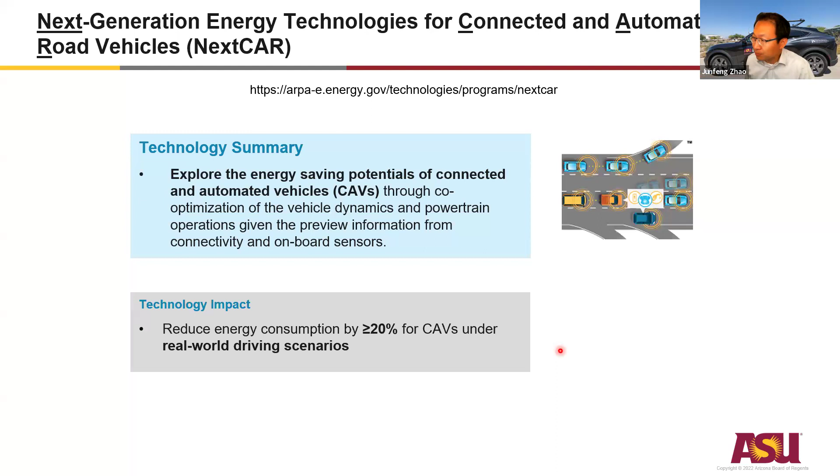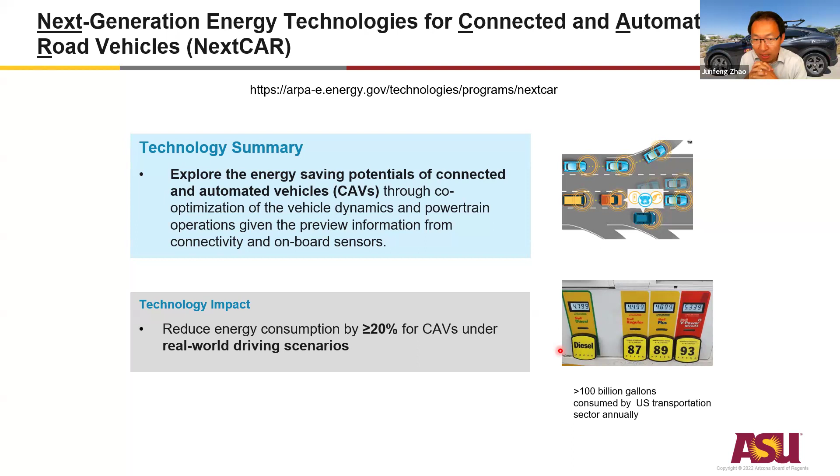Now let's look at the first part. So in 2017, ARPA-E launched this NEXTCAR program, like I mentioned, mainly to explore the energy saving potential for connected and automated vehicles. Because we'll have onboard sensors, we'll have connectivity, then we can have better preview of what's going to happen in the traffic scenario, right? How do we leverage that and combine it with vehicle dynamics and powertrain control to improve not just the vehicle itself, but imagine we consider the transportation system as a whole? How do we improve the efficiency? The goal was quite ambitious. The overall program goal was to reduce energy consumption by more than 20% for CAVs under real-world driving scenarios. One thing is 20% is a keyword. The other is it has to be proven that it works in real-world driving scenarios. I think during that project, those two were kind of two challenging key points.

So back then, there were in total 11 teams participating, across different powertrain types: light duty, medium duty, heavy duty vehicles. GM, actually our team, was the only industry-led team participating. So we focused, back then, on the light duty vehicle.

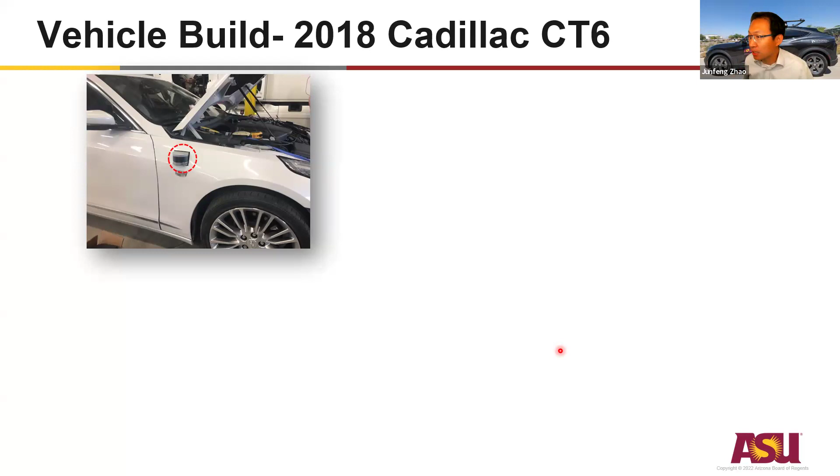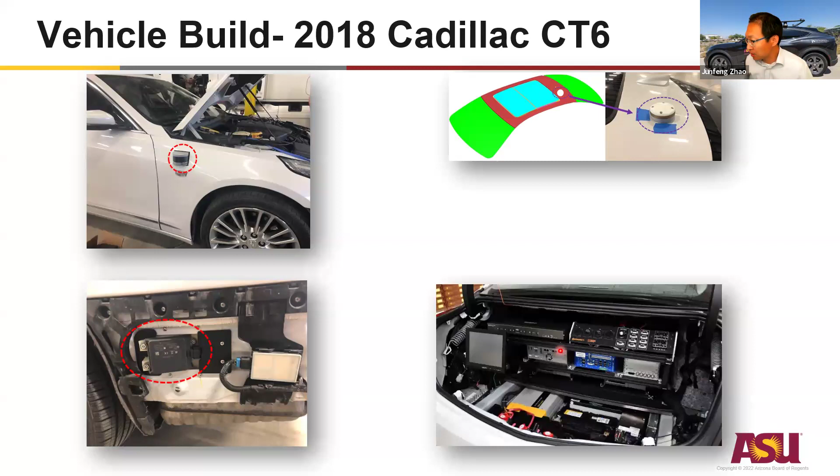So this is our test vehicle. We took the 2018 Cadillac CT6, the first generation vehicle model equipped with GM's Super Cruise Level 2 automation capability. But then we added additional sensors to the platform. You can see one of the Velodyne lidars installed here, one of the radars installed behind the bumper, that's the antenna, GPS, and there's a bunch of things in the trunk. But this is a final product, so all the sensors were integrated to try to make it look like a normal vehicle, close to a production type of vehicle.

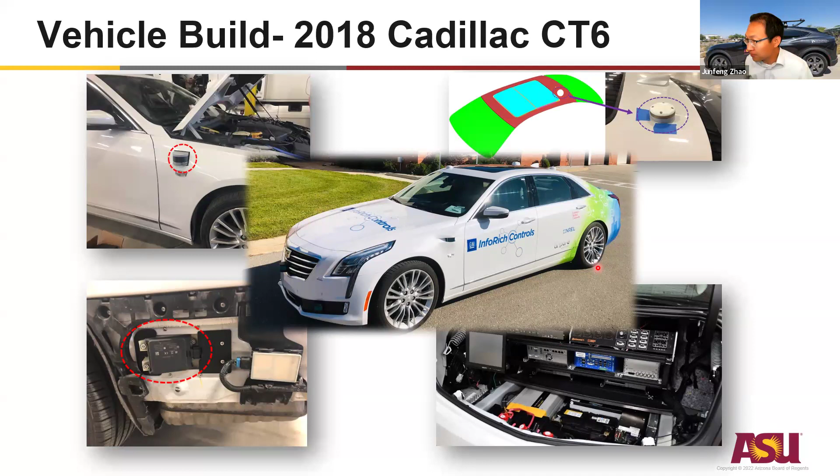And of course, we need connectivity to make it not just automated, but also a connected vehicle. So we have installed a DSRC module on the vehicle. At the beginning, we tried to install an experimental Continental eHorizon module, but eventually we didn't fully utilize that one — we just leveraged the HMI capability from it.

Computing power-wise, we have in total 5 CPUs installed. That's a lot of computing resource, but at the same time it consumes a lot of energy. We had to reroute the AC pipe into the trunk to cool them down. So that's one thing. We also have 2 MicroAutoboxes.

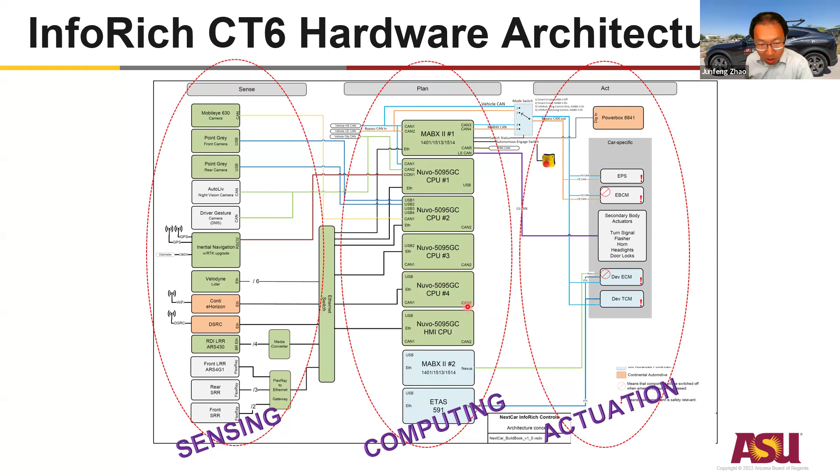We also have another dedicated real-time controller to do the powertrain control ECU calibration control, so that we can recalibrate the ECM and also the transmission control. Overall, it's quite a lot of components integrated, and quite a complex system to debug.

Okay, so after talking about the hardware, let's take a look at the software design. Basically, we took the software developed by both CMU and GM as a very classical architecture. We have the perception, we have hierarchical planning from mission planning or route planning, behavior planning, all the way to short-term path planning, and then it goes to the actuation part.

That's a very classical architecture. But on top of that, we basically integrated a new algorithm to enable long-horizon speed planning, leveraging the onboard sensing capability plus connectivity. Here, the connectivity mainly focuses on getting signal phase and timing from connected traffic lights, in order to enable eco-driving for the system.

So that includes, for example, if you can predict there's a lot of traffic in front of you, or the traffic light is going to turn red although right now it's green, you want to actively manage or plan your vehicle's speed trajectory so that you can achieve the most efficient driving. Or for departure, you can calibrate the aggressiveness when you start from a stop. And for eco-cruise, you want to make the speed trajectory of the ego vehicle smooth and harmonized with surrounding traffic.

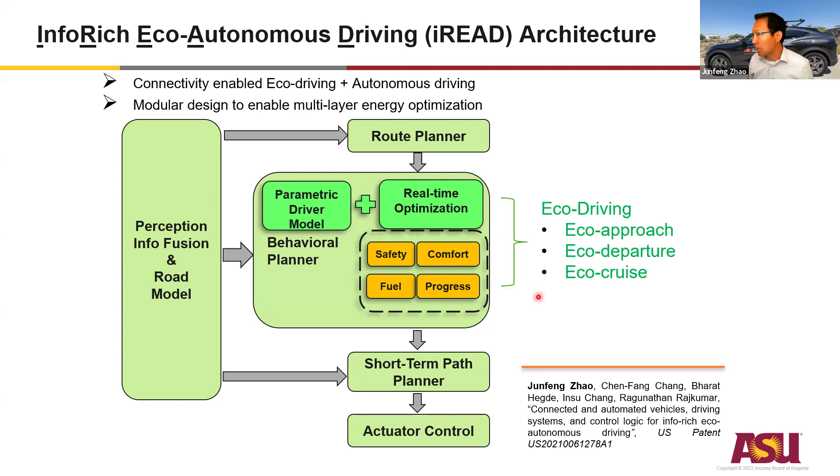In order to achieve that, we designed two components. We introduced a parametric driver model and also conduct real-time optimization considering several factors, including safety, comfort, and fuel consumption — that's the main thing considered — and also progress. I'll introduce how the algorithm considers those factors.

This is the parametric driver model we derived from the classic intelligent driver model. The difference is now we have to consider, for example, the stop situation. There are three terms governing the acceleration or speed profile. One is speed tracking, so we have the speed limit of the road as one of the parameters. Of course, we also have to look at the car-following distance. The third one is just the stop, which could be a stop sign location, or it could be the distance to a traffic light, a red light.

So this is how you define those minimum distances. There is one variable here very critical for our design: the headway. This headway defines the minimum distance for car following, which is a dynamic part of this equation.

There are many parameters we can tune to change the driving behavior derived from this model. For example, we can give different values for the aggression factor. If you look at the curves with different aggression factors, it can dramatically change how the vehicle accelerates or decelerates. The speed factor basically determines whether you will drive at the speed limit, below it, or above it.

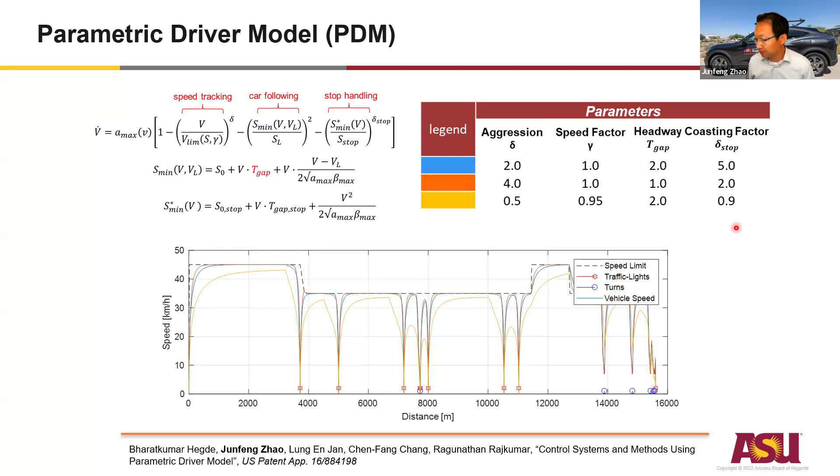So this is our real-time optimization algorithm. There are several steps. The first one is to assess the ego vehicle's current traffic environment. We specifically focus on, for example, what's the status or future status of traffic lights, and also what's the lead vehicle situation.

Mostly this project focuses on longitudinal control; we don't do the steering or lateral control, because longitudinal plays a major role in terms of fuel economy.

So your headway could be—we set a constraint—between 0.5 second and 5 seconds. Of course, we have different weighting factors based on the distance we can evaluate.

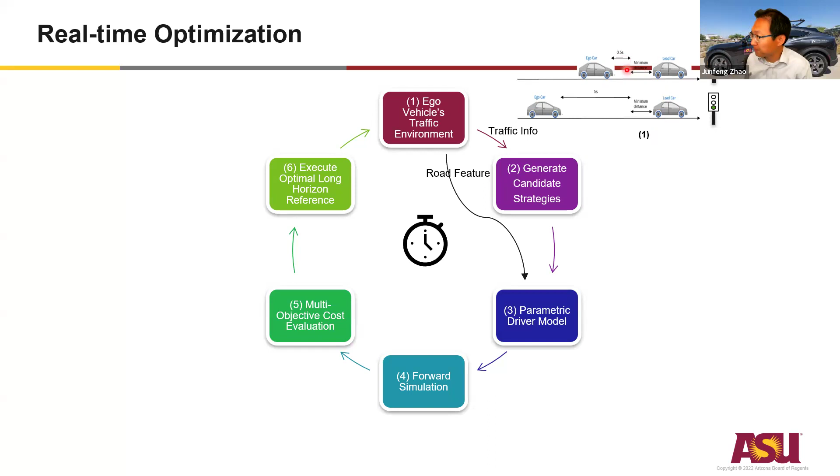Then we will do the sampling for the headway. Assuming your current headway is 1 second, and we predict over a long horizon of 10 to 15 seconds, what would be the options? What would be the candidates? What would be the potential trajectory that the ego vehicle can drive at?

For example, we can start with this small headway and gradually increase to the maximum, or we can reduce to the minimum, which is 0.5 second. That difference in headway will lead to a different speed trajectory or acceleration profile, based on this parametric driver model. For each headway profile, we'll get a different acceleration profile.

Then we can inject that into the model and do the forward simulation, based on the current ego vehicle's location, dynamics, and surrounding vehicles—especially the lead vehicle's current status and kinematics model—we can do the prediction of how, in the next 10 to 15 seconds, that situation will evolve.

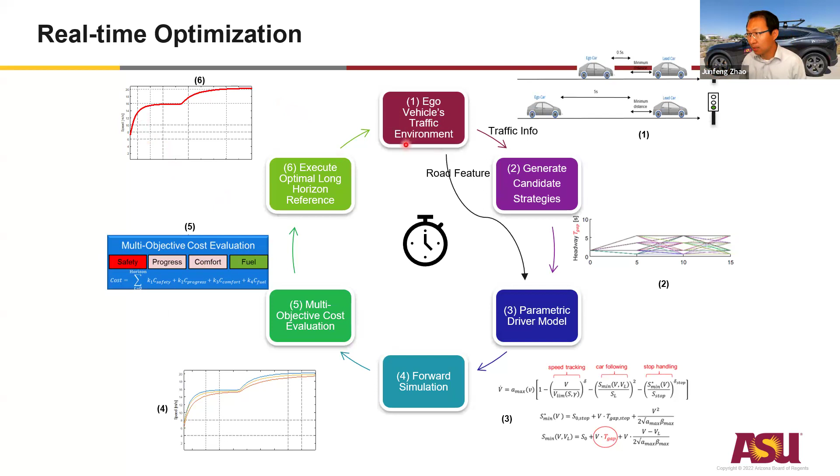Then we'll do the multi-objective cost evaluation for each candidate profile, paying attention to those 4 factors, and then get the most optimal one and use that one to be executed. So that's the algorithm development.

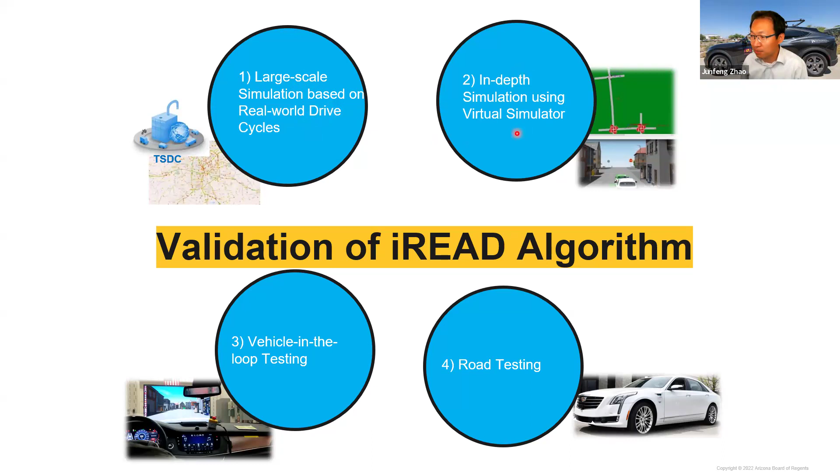But in order to validate effectiveness, how that affects fuel economy, we developed 4 different testing approaches to validate: the first one is large-scale simulation, second is in-depth simulation, and then vehicle-in-the-loop testing and road testing.

This part was handled by NREL mainly. So they took the algorithm we developed and plugged it into their database. They actually selected 10,000 routes from their TSDC database.

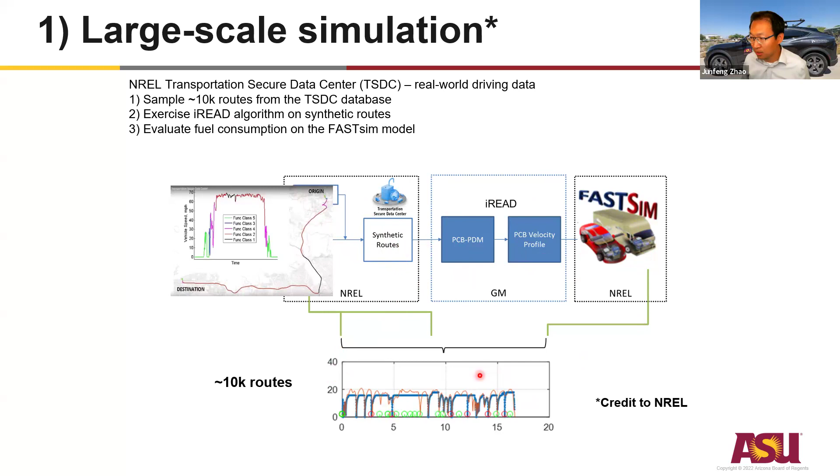They did synthetic routes and basically generated longitudinal speed profiles, then ran them through their FASTSim model and computed the fuel economy difference. They've done this for 10,000 routes.

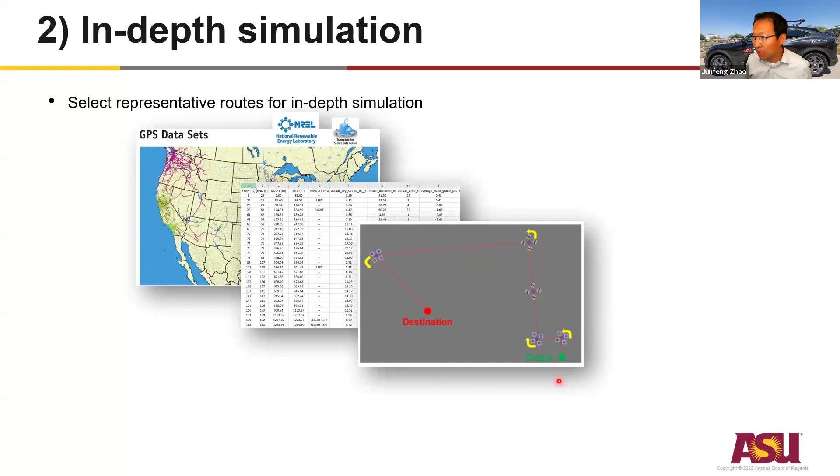From those 10,000 routes, we select roughly 16 to 20 typical routes and do the in-depth simulation. We generate those routes in the 3D simulation environment and test with higher fidelity.

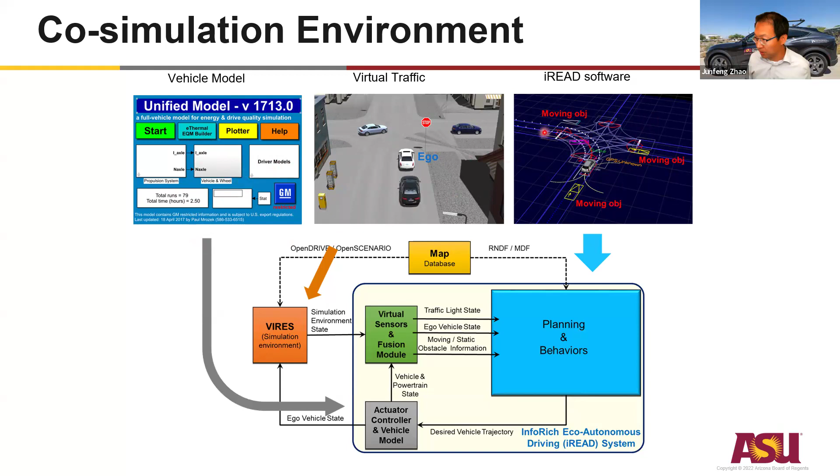So we construct this co-simulation environment that involves a virtual traffic environment, the autonomous driving software stack, plus the in-house vehicle and propulsion model. This can closely reflect the dynamics and fuel consumption of the CT6 test vehicle. We put them all together to do a co-simulation for those selected scenarios.

So this is just a short video clip to show how it works. You can see that's the ego vehicle's model, and we have traffic lights. The vehicle will predict the traffic light phase and timing, and drive in this virtual scenario. We can collect the fuel consumption or other vehicle information from the high-fidelity vehicle model. That's how we do our in-depth simulation.

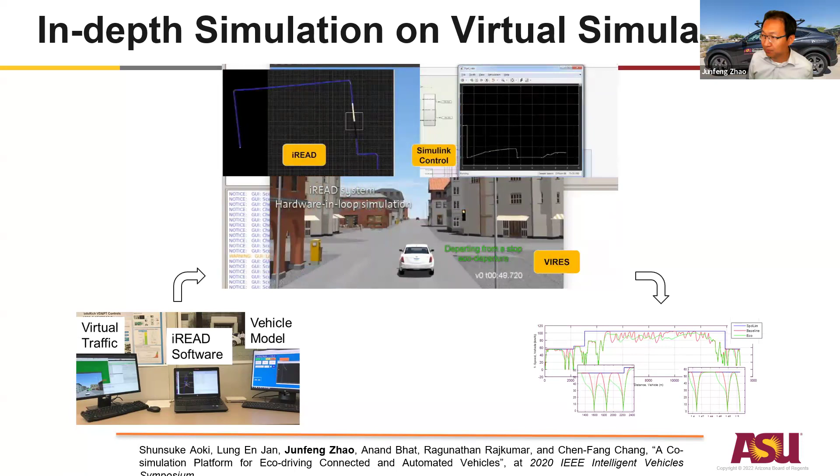Then we move one step further, because everything before that was simulation. Now we start to really look at how does that apply to a real vehicle. So we did this vehicle-in-the-loop setup. The idea is similar to the co-simulation. We still use a virtual environment, but this time we'll generate the speed trajectory and directly apply it to a real vehicle, the real test vehicle running on the chassis dyno instead of the vehicle model.

Of course we have dyno control, and we have real-time feedback, real-time speed and other measurements going into a 3D vehicle dynamics model, and it goes back to the virtual environment to close the loop.

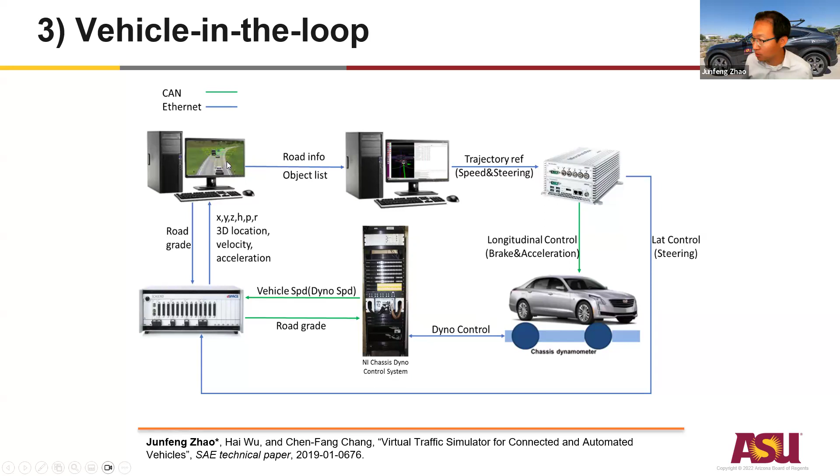So this is the setup we have at the back at GM Proving Ground. The vehicle was secured on the chassis dyno, but in front you can visualize the virtual environment the vehicle is being tested in. We also have a fuel meter hooked up to the vehicle. That's one specific benefit we can get from this vehicle-in-the-loop setup.

Because we do want to have the precise - that's a kind of requirement - the real-time precise fuel consumption measurement. So in this indoor setting on the chassis dyno, we are able to do that.

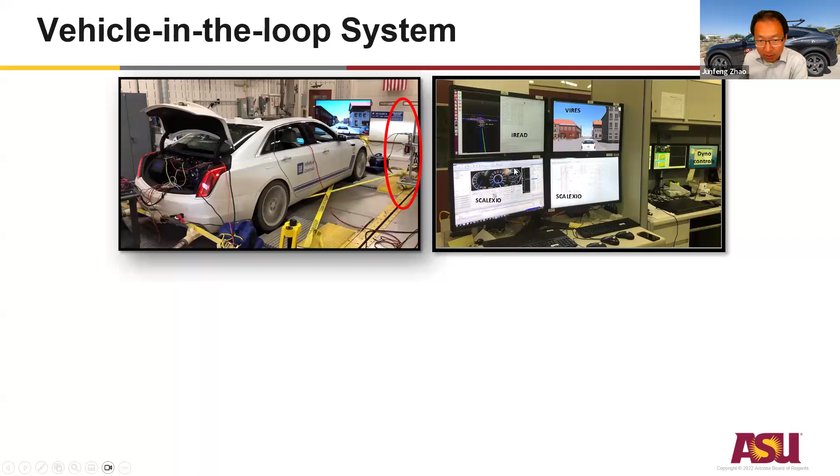So this is in the control room. We have the virtual environment simulated, the autonomous driving software, and the controller, and the 3D vehicle dynamics model running at the same time.

This is just the cabin view. If you're a driver, or a passenger in the driver's seat, this is what you can observe - the virtual environment - but at the same time you can real-time monitor the fuel consumption and other powertrain characteristics.

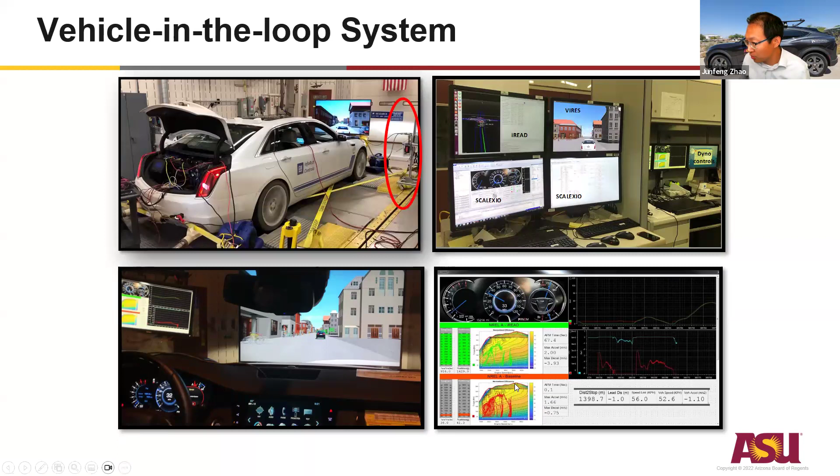So this is basically - we can do the cycle-to-cycle comparison to see for each scenario how much cumulative fuel consumption we had. This is the engine map and other calibrations.

And this is a video clip to show how everything is in motion. So you can see secured on the chassis dyno, the vehicle is driving. The dynamics is fed back to the virtual environment, reacting to, for example, the stop sign.

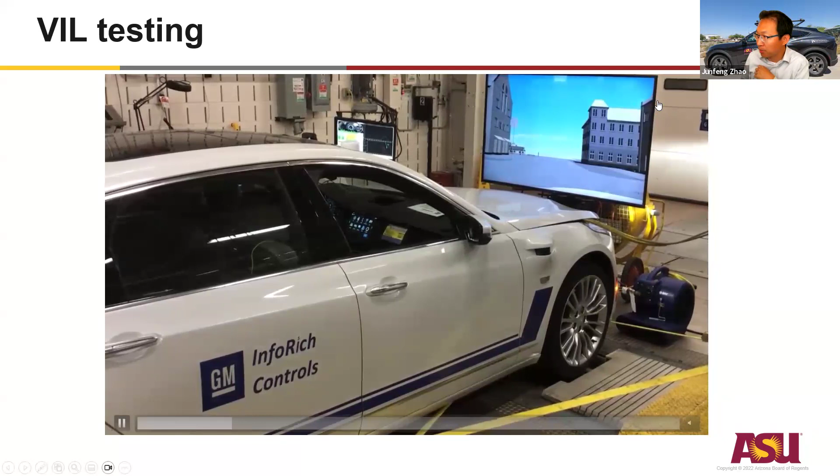Of course, when you do a turn like this, we don't steer the vehicle on the chassis dyno, but we do send the steering command to the 3D vehicle dynamics model to augment that, so that in the 3D environment you still have the left turn, right turn, the lateral dynamics.

Then you will see that this vehicle can interact with other vehicles spawned in this virtual environment, and also, of course, the traffic lights. So we would basically kind of create a metaverse for this vehicle to be tested.

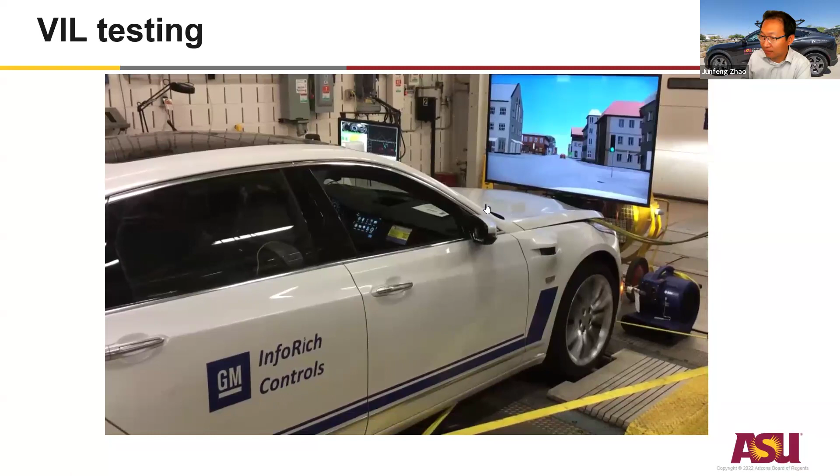And of course, after doing the vehicle testing, our next step would be how do we put this into real-world testing, road testing. So one thing we need to again configure is how to get the traffic light signal from connected traffic lights. So this is what we did.

Basically we instrumented an Arada roadside unit, which sends out the SPaT information, and we have this onboard Cohda unit integrated into the vehicle, receiving that signal and passing it along to the autonomous eco-driving software stack to synthesize through that parametric driver model, and also goes through the real-time optimization. So we can get the traffic light information incorporated into the driving.

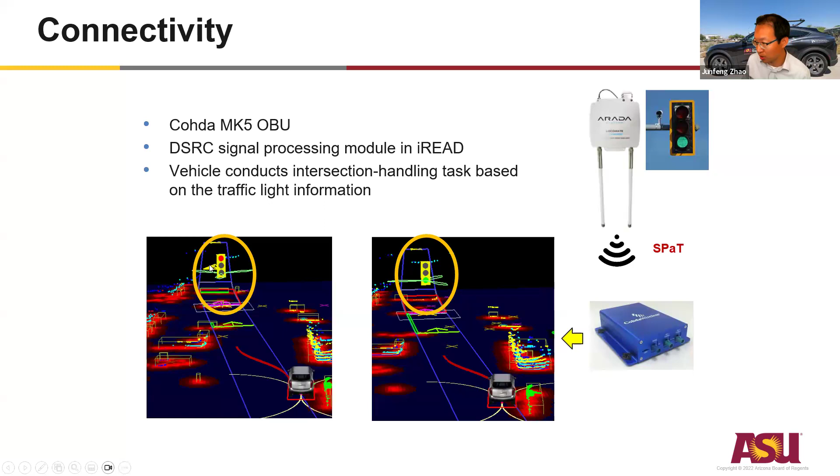So we actually did road testing. Of course, we built two identical vehicles, one for GM, one for CMU. On the CMU side, more focus on the road testing.

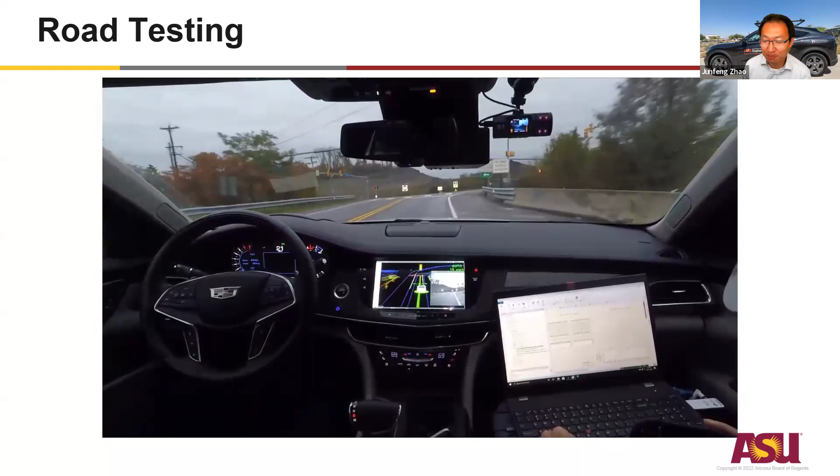I'm not sure if Rahul can recognize this route. So this is a testing we did with Professor Rajkumar and other students on a public road, with all the equipment kind of integrated functionality. So it was actually during COVID, so you can still see that we're wearing face shields. Feels like centuries ago, but that's what happened back then. Got quite a bit delayed for the testing, but we still managed to get it done, put the vehicle on the road, and collect some results.

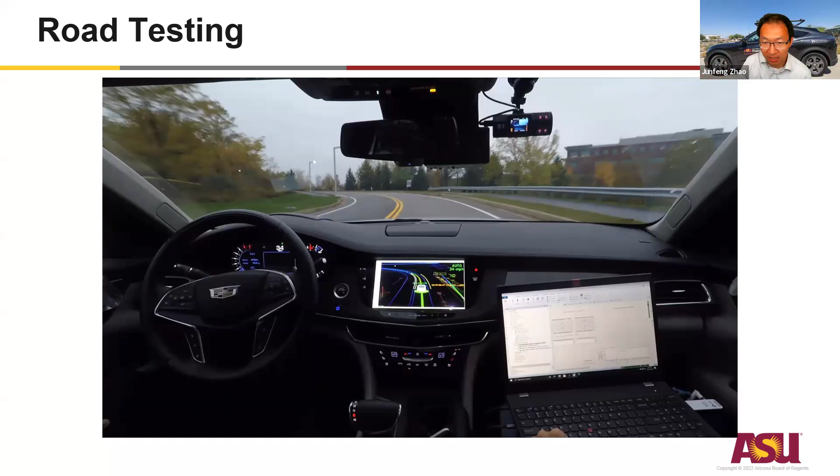And this is running like what kind of software now for the autonomous driving? So for this part, this is the software stack we built upon the version that GM and CMU co-developed, but we modified it - we kind of insert our autonomous algorithm into the software stack. Cool.

So overall, this is a summary of the energy benefit we achieved from 4 different testing approaches. For the large scale simulation, we had 10,000 different routes. In-depth simulation dramatically goes down to 16 — that's a 3D environment, and it's really time consuming to construct those scenarios. We selected down to 3, which involves a real vehicle for vehicle-in-the-loop testing. It's even more time consuming and requires a lot of resources. We eventually had just 1 route for road testing.

Back then, the idea was to establish the connection from one step to the next, so that some of the statistical results can be inferred or derived from the previous step. Overall, we got very similar results from different methodologies, roughly between 11 and 14% of the fuel benefit.

Of course, there's a separate eco-routing benefit from NREL's simulation, which was to choose the most efficient route, just like Google Maps currently offers — the eco route. Google actually collaborated with NREL and commercialized this feature, adding roughly another 7%. So in total, we achieved about 20% of the target.

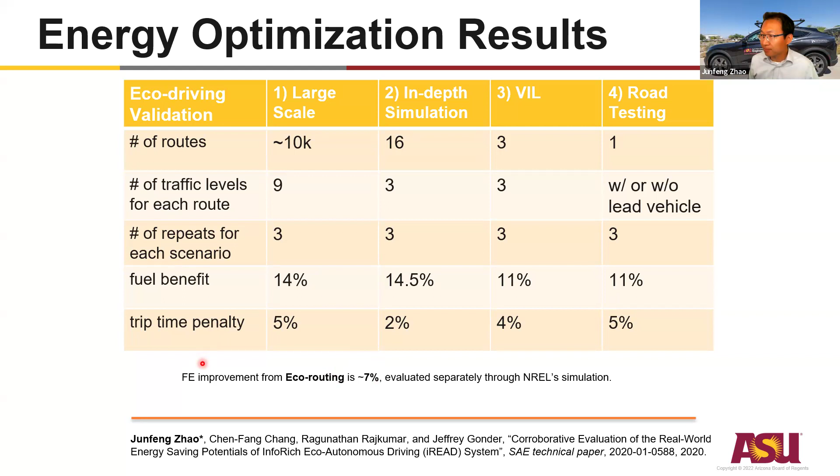But that involved a lot of testing, validation, and tools development. So that's very quickly about the old project.

Now I'm going to shift gears a little bit and talk about the project we started last year, mainly focused on safety.

First, I'd like to give an introduction on the background of how automated vehicles are going in Arizona. Arizona is the first state in the nation to embrace this new technology and allow more flexible testing and even commercialization deployment, especially in the Metro Phoenix area.

You'll see way more robotaxis nowadays — you can actually have an app and hail a robotaxi in this region. You'll also see, for example, GM Cruise was testing in this region before, and this is our vehicle. Three vehicles were on display at one of last year's events.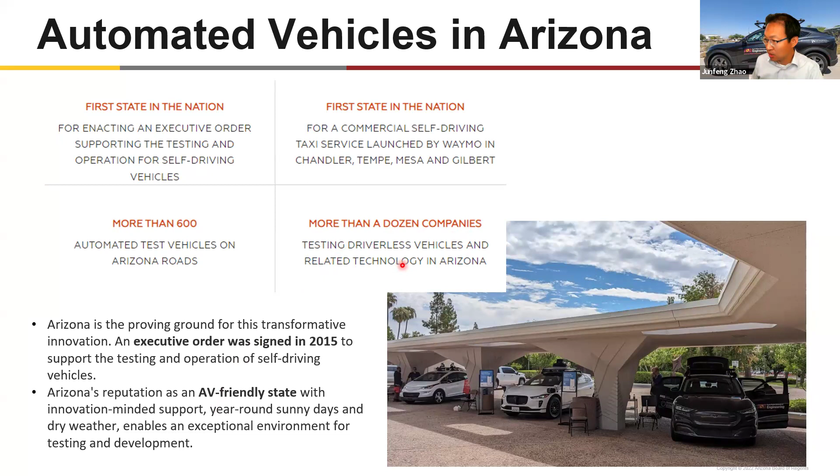Arizona is an AV-friendly state, not just because of the legislation, but also because of the good infrastructure and the weather here. Everyone's embracing the first day of spring, and we're already starting to look like the first day of summer. Year-round sunny days, dry weather, not much rain and snow to impair sensing capability. There are dozens of companies testing here — that's an advantage and a uniqueness in Arizona.

But the problem is that the public doesn't really know the safety side of things, even though we have many robotaxis and many autonomous testing fleets running around.

Back in 2018, the Uber accident happened near the ASU Tempe campus — one pedestrian was killed. It was quite a tragedy, but it brought people's attention to how to evaluate, especially in the state of Arizona, how to evaluate safety and how to regulate AV safety. Back then, the Institute of Automated Mobility was established with both industry and public institution partners participating. Our project is derived from that institution.

I worked with Dr. Jeff Wishart from Science Foundation Arizona and the Arizona Commerce Authority — he's also affiliated with IAM. Together, we wanted to develop a safety case-based framework for AV testing evaluation. This project was kicked off last year.

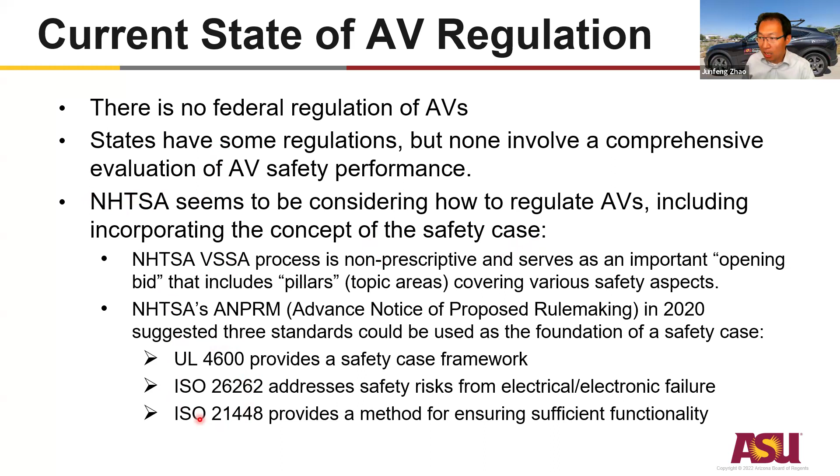Currently there's no comprehensive federal-level regulation of AVs. Some states have guidelines or regulations, but it's still not comprehensive. NHTSA is trying to promote something — they're trying to give out guidelines to build up the safety case concept. They even indicated 3 standards that can be utilized, but everything is still in motion and still under development.

So our mission is to try to develop a comprehensive framework that can be adopted either by third-party evaluators of AV technology, such as AV regulators, or adopted as part of AV development.

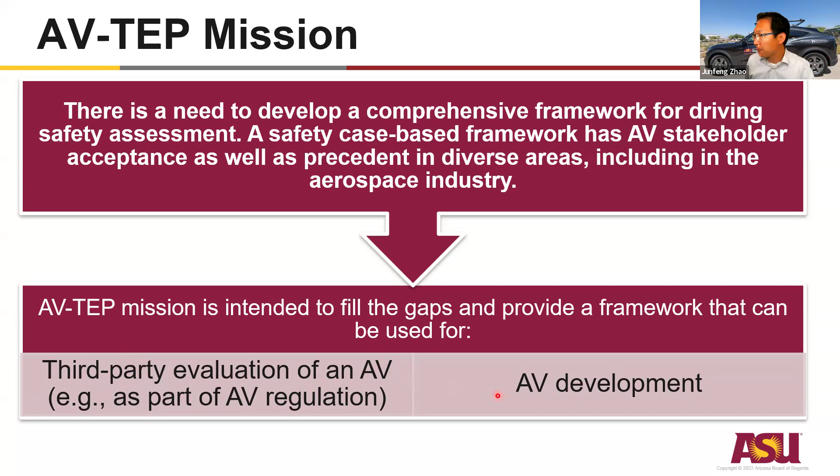Dr. Jeff Wishart and other colleagues from IAM spent quite a few years before I joined ASU developing metrics for AV safety evaluation. Jeff led the SAE On-Road Automated Driving committee via a Verification and Validation task force to develop SAE J3237, which contains mainly three categories of metric approaches: black box — observing the vehicle's behavior from outside; gray box — where you can interact with the system and get some numbers and metrics from that; and white box — assuming we have access to all or most of the important data from the vehicle itself to come up with metrics.

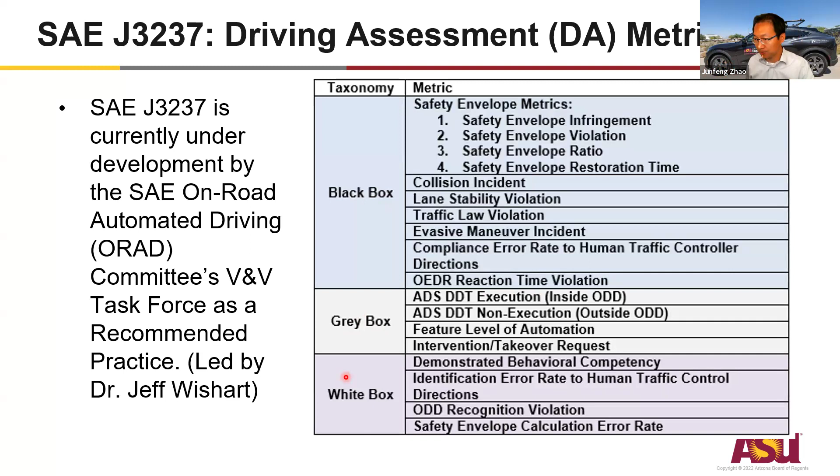Not just those metrics, we have also developed a concept to aggregate them. For example, in certain scenarios there might be several metrics—safety envelope violation, traffic law, collision incident—and you can aggregate those into a single score for that particular vehicle in that scenario. This concept was published in an SAE paper summarizing how this score can be calculated. The idea is to propose a driver test for an autonomous system, just like a driver test for a human driver. Eventually you have to give a score, pass or fail, to that driving scenario and that driver.

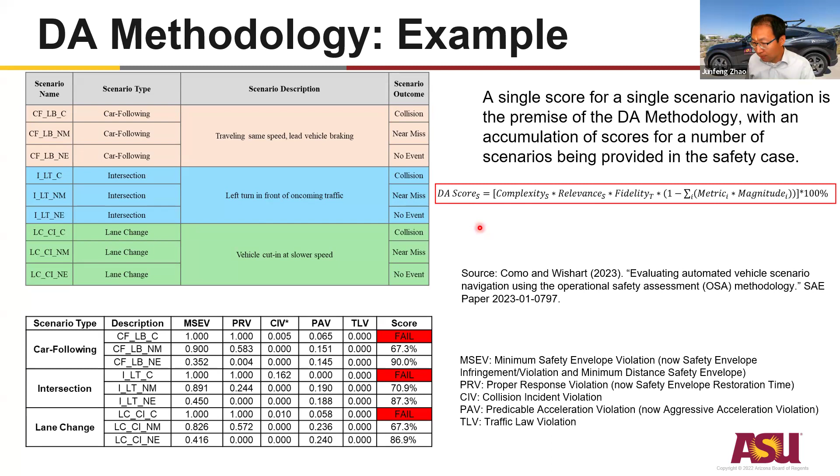This DA scores approach has been validated extensively in simulation, but with our lab participating, we are now able to move forward to real-world testing, leveraging the research vehicle. The idea is that a pilot study will be done on our research vehicle, and then the learning and framework can be transferred to, for example, the industry partner we're working with, May Mobility, to their fleet for further validation.

At the same time, we will leverage the previous study. We have a smart drive intersection instrumented, so we can still leverage the black box approach to analyze the testing results.

A little bit about our new vehicle: we built this research platform on top of a pure electric vehicle, a Mustang Mach-E, which has Blue Cruise level 2 automation. We augmented the sensing by adding two more Ouster LiDARs, one RGB camera—though we're in the process of adding multiple more—and a high precision GPS system. We also have a lot of computing power and controllers in the trunk, plus a long range radar installed in the front. That's our vehicle setup.

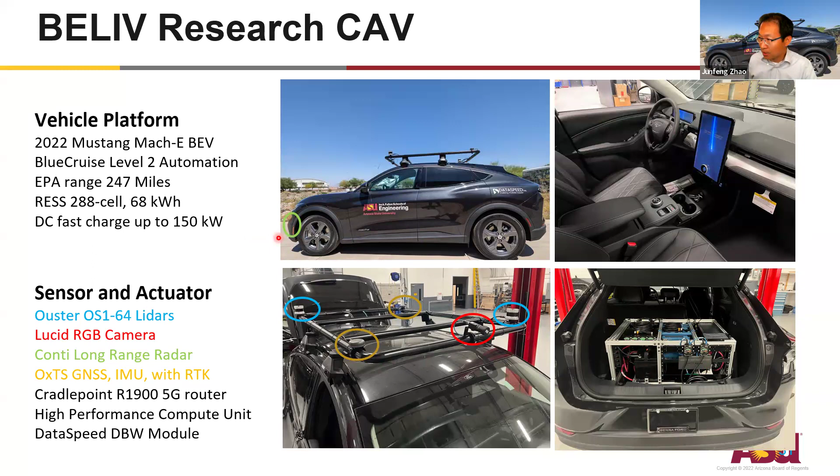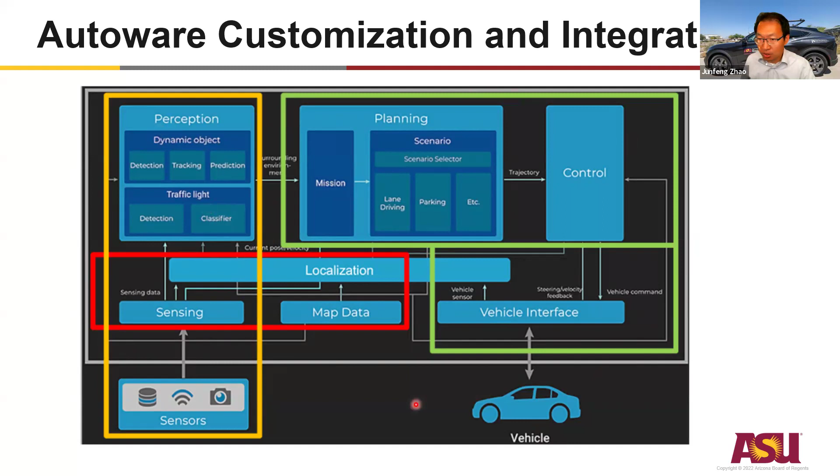Now comes Autoware. We're able to leverage the open source community and all the contributions from it to integrate this into our test vehicle. One thing we had to do ourselves is integrate Autoware.universe with the Dataspeed drive-by-wire system, since there was no existing vehicle interface out there. So we developed our own interface to translate Autoware's control signals to the Dataspeed drive-by-wire system so the two pieces can work together. Since we couldn't find an open source interface, we made ours available—you can find the GitHub link in this paper, which will come out in this year's SAE World Congress.

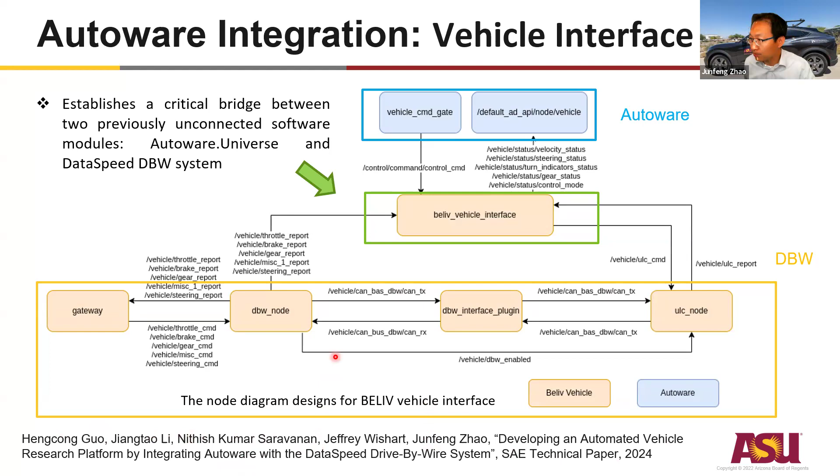After all the integration, we started road testing just around our campus route. This was at the end of last year, doing some road testing with our students.

Once we finished the vehicle integration and started road testing, we faced an issue: in simulation we can arbitrarily design things and do testing, including arbitrary corner cases and very complex scenarios. But in real traffic, you cannot dictate what happens.

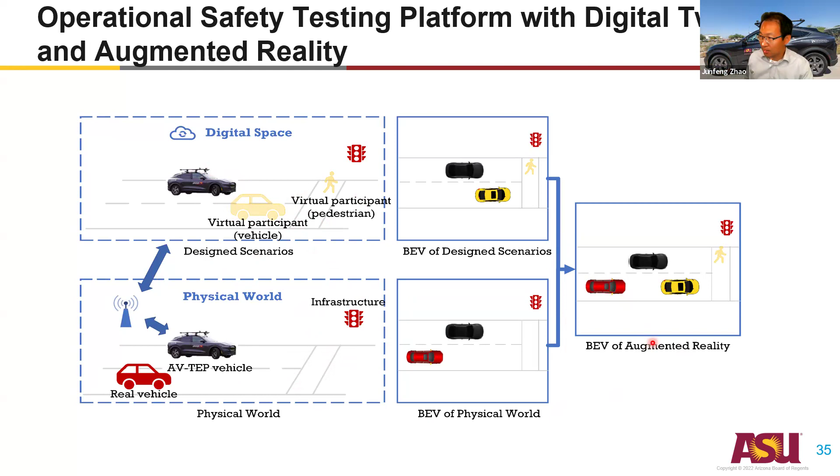So we came up with the idea to develop road testing with digital twin and augmented reality. The idea is: we have our ego vehicle running in the physical world, interacting with other traffic, vehicles, and pedestrians. But at the same time, can we integrate the digital simulation part? If we run a simulation, can we directly replicate it in real-world road testing—putting virtual vehicles and virtual pedestrians overlaid with the physical world—and have the vehicle test out its planning and control capability? That's the original concept and design, and the next tool we developed for testing.

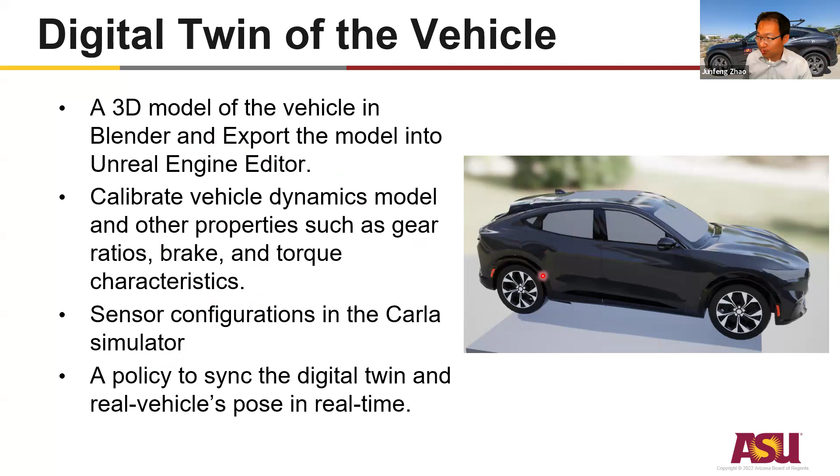First, we developed the digital twin for our vehicle: we got the 3D model and calibrated the dynamics, configured the sensors so the sensing capability is close to the real vehicle, and developed a policy to synchronize this digital twin with our real vehicle. We also developed a virtual test ground for our campus route—this is the ground truth, and this is our digital replica of the campus route.

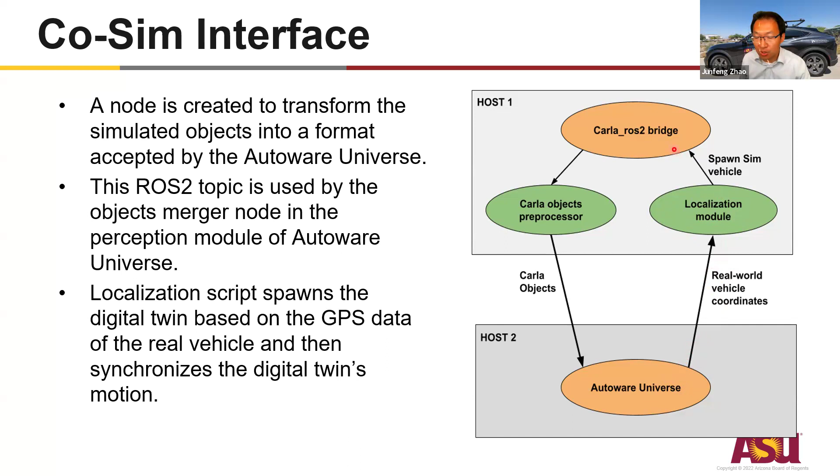Then we created the interface between the Carla simulator and Autoware. Basically, we extract virtual objects from Carla and publish them to a topic accessible by Autoware's perception and planning modules. To close the loop, we send the real vehicle's real-time coordinates back to the localization module to spawn our ego vehicle and track its synchronized motion in the virtual environment.

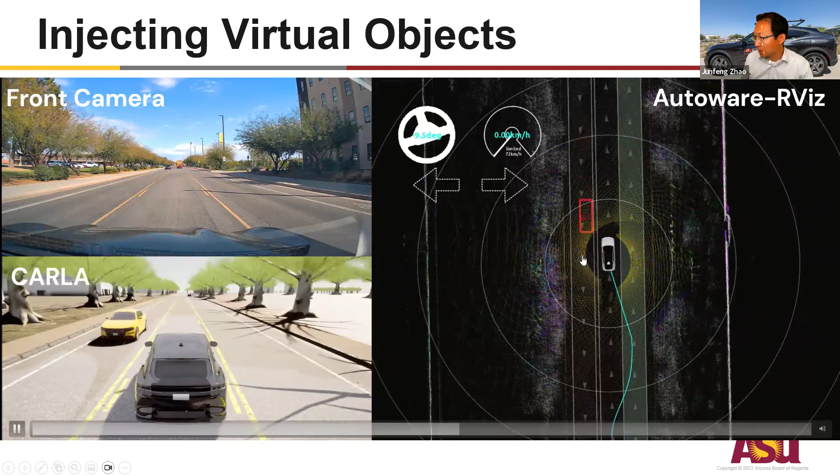Here's a quick demonstration of how this works. Our vehicle is parked on the campus road, but you can see the red box—that's a virtual object injected by the simulator. At the same time, we're still detecting real vehicles, like the shuttle and the car, and there's also a virtual car from Carla being detected. That's the mixed reality approach for the vehicle's perception module.

Then we also test out when the vehicle is in motion. This is a very simple scenario we can create. So we have a few vehicles in front of us, and we can test out the car following maneuver. In the real world, there's just empty road, but over here we have traffic so that we can interact. The vehicle will slow down and follow that virtual vehicle. So it's relatively safer to hit this one than the real ones on the road.

So we have done, so far, one year into the project, a lot of tools development to enhance our testing capability. Future work for this project is to really put these tools into testing and validation.

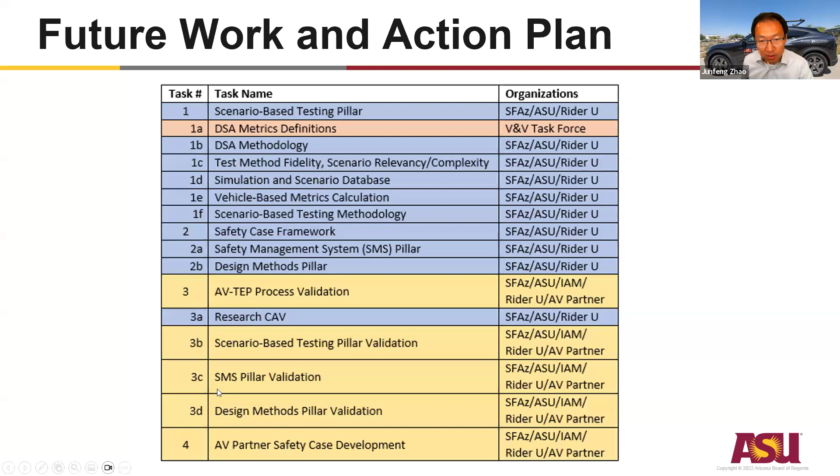So you can see we have collaborated with Science Foundation Arizona. There's quite a lot of activities already, especially from the simulation side and the methodology and design methods development. But in the future, there's a lot of validation work that will be conducted, and those tools will be utilized to support this validation.

Another challenge is the AV data. For our research vehicle, we can have a white box, it's completely open source, but for industry partners, for industry AV developers, they might not be willing to share some of the data, unless we specifically list out that this signal or other signal is important and has to be there.

And there are different SAE levels. Each different level might have a different specific process approach to regulate and validate. Also, over-the-air updates: you're testing and evaluating the vehicle today, and the next day there's another patch, so the software is different. And also AI-based systems can sometimes be not transparent, difficult to evaluate, and sometimes they can learn the evaluation process and optimize just against that.

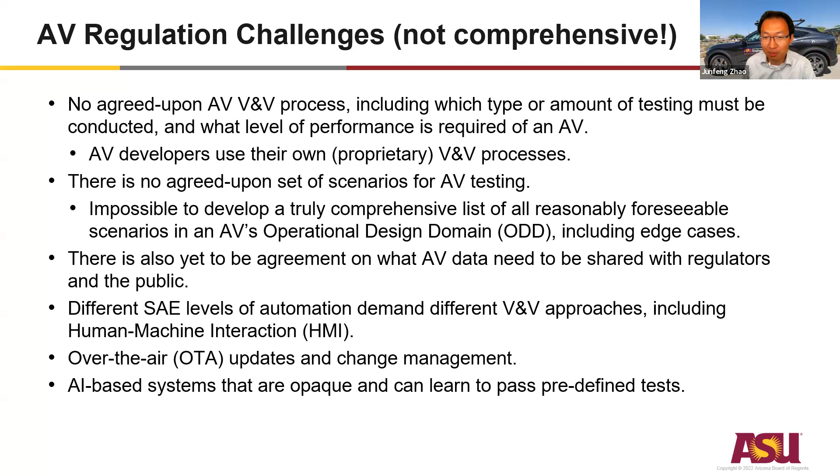So that's some of the challenges. But again, for the first year, we focused on developing the tools for evaluation and testing, and a lot of students were involved and made contributions to those tools.

One more tool is our driving simulator, with a motion base that students have developed. Eventually this will also be connected to the vehicle and to our Autoware package. But they're also having a lot of fun, I think sometimes they just use this to play a video game, a racing game.

So, final thoughts. I think the safety assurance case definitely needs to be built through a comprehensive combination of evidence from various methods. We can do simulation, vehicle in the loop, on-road testing, closed track testing, and maybe other things, maybe just focusing on the perception part using AI to evaluate. But it has to be a comprehensive combination of methods. And we know that many other organizations and consortiums are working on this, and hopefully our effort will be part of that and make a contribution.

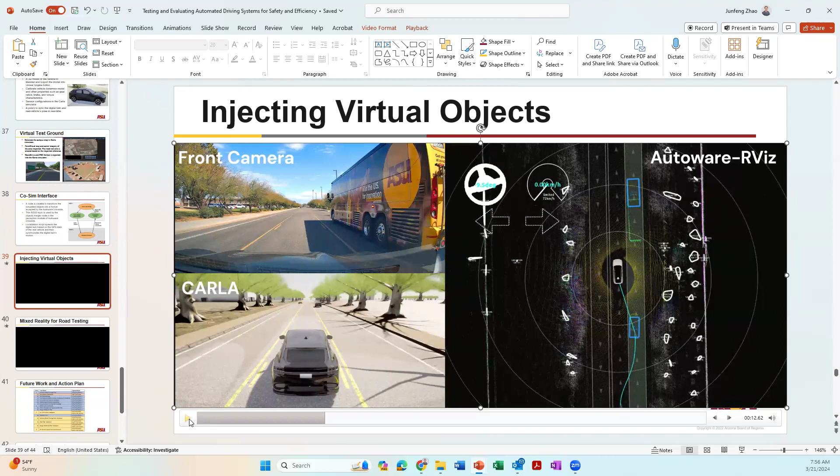This is Khan Azbey. Great talk, thank you for taking the time. So this mixed reality environment, you are injecting virtual vehicles into the real world environment, if I understand correctly. But does the driver in the real car get confused? I mean, you have real vehicles and virtual vehicles, and I got confused myself, maybe it's my age. After a while, they learn that virtual vehicles are only virtual, so they might be less careful. But that's not that important. I think this differentiation between real and virtual vehicles, how does it work?

Yeah, absolutely, you're right. When I was sitting in the driver's seat, I got confused too. There are two monitors. One you can look through the windshield to see the real thing, but there's a monitor to show you the virtual vehicle. The real idea behind this is to let the autonomous system assess both real and virtual objects, so the autonomous system has no issue combining and interacting with both. This is completely autonomous, so there's no driver involvement, we're driving hands-free, just observing what's going on. It's a little bit confusing to human eyes.

Good, thank you. Hi, this is Charlie, can you hear me? Yeah, I can hear you, Charlie. Hi, thank you, Junfeng, for this wonderful talk.

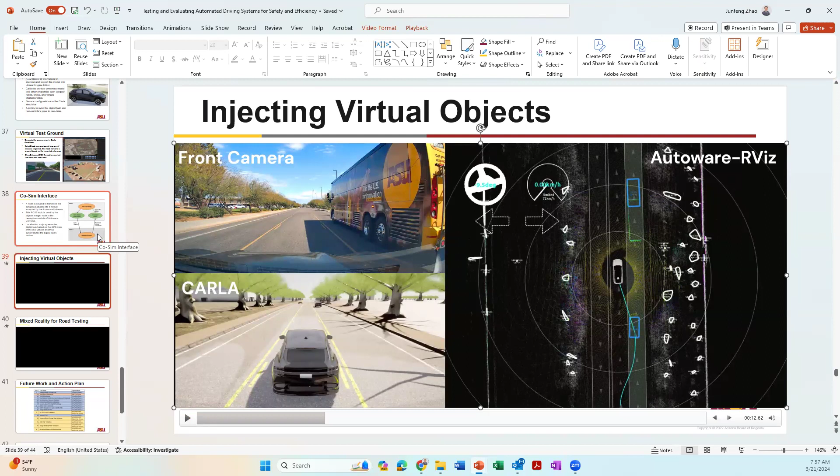Following up the previous question, this virtual injection and simulation, was it running on the vehicle stack, or is it somewhere on a server with the injection done through the internet or some communication, or is it real time with the vehicle?

That's a great question. Right now it's on board the vehicle. We have two computers: one running Autoware, the other running the Carla Simulator. Both are connected through an Ethernet switch, communicating with each other. But you're right, actually in our plan we potentially can do wireless communication.

So you could remotely inject or create virtual scenarios if needed. Okay, thank you, because at UB we had similar ideas. Maybe I can follow up with you privately to have some discussions. Very interesting work and very relevant to our work too. Thank you very much. Yeah, absolutely.

Thanks, hello professor, this is Sugosh Rao from Transportation Research Center. Thank you for the talk, it was really exciting to hear. Another question about the virtual object injection: are you guys just updating the object list in the ROS node, or is there any aspect of sensor in the loop? Like, are you feeding actual camera feed from Carla into your cameras, or is it just the object list that's being updated?

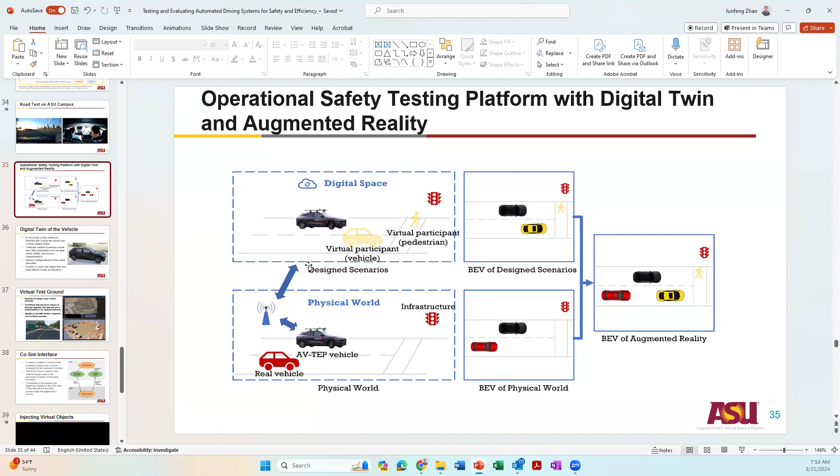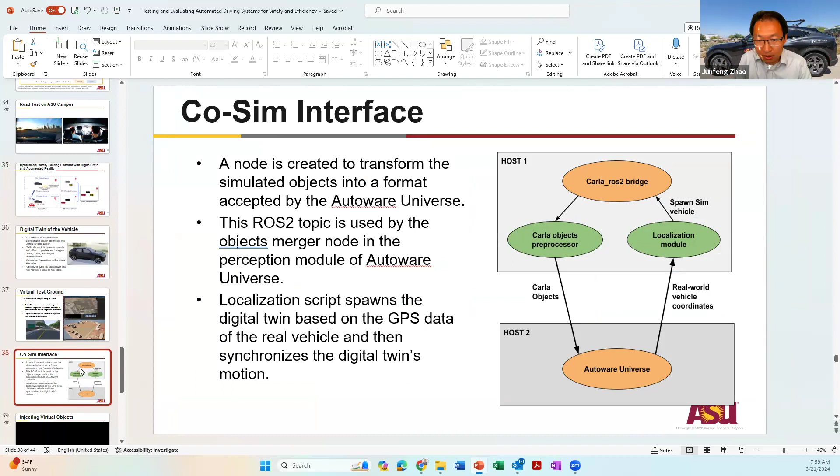Good question. Right now it's just the object list. If we were to inject the raw image or even raw point cloud data back into Carla, there are a lot of other issues we'd have to consider. For example, even though we built the virtual test ground trying our best to simulate the environment, it's not identical, and there would be a lot of confusion caused in the perception part. So right now we just focus on extracting the object list from the Carla Simulator and directly putting that into Autoware.

I'd also like to thank you for publishing your bridge between Autoware and DataSpeed. We are currently running Autoware.ai with DataSpeed drive-by-wire, but we want to update to Autoware.universe, and since you've done the groundwork, that's going to help us quite a bit.

Thank you so much, glad to know. I think that's definitely our intention, to get it open source, because we struggled in the beginning since there was no such interface out there. We benefited from a lot of open source components from Autoware, and we want to contribute back to the community by putting our effort out there. But if you need any support or help with that vehicle interface or your vehicle integration, I can have my student provide some tips or insight. Thank you so much, we will probably take you up on that.